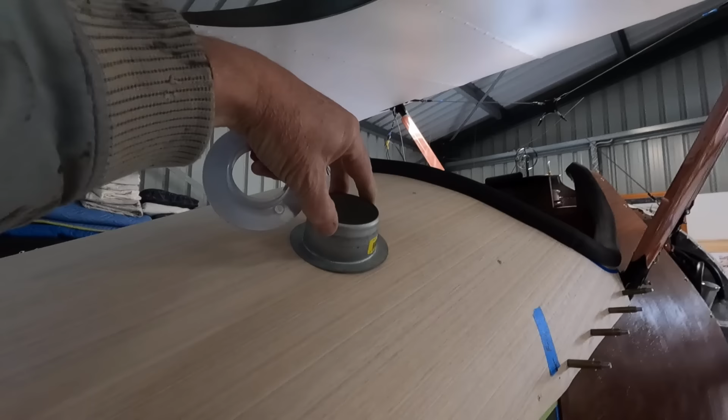Also remember last week we were talking about the handhold. Now I'm very reluctant to drill a big hole in my aeroplane, but I think I'm going to have to. Not sure if I just go with plastic. This is flat, which is telling me straight away - I guess I could hit it with the heat gun to get the flange to sit down flat, then paint that up. I've got a metal one which could do it, I could potentially tin tap that. Depends on, that's probably 3-inch I think. I got a 40mm and I got a 50mm. Screaming test piece, isn't it, guys?

As I covered off before, you don't want to go boring through the longeron, or stringers - I know someone corrected me on that, but these guys here, they are longerons. So, yeah, do I want to drill a hole in this? I think I'm going to have to, so I can get in and out. I'll practice getting in and out.

Today I'm going to reinforce the inside edge, and that'll probably be it for the day. First of all, I'll take out the bracket and fit the anchor nuts, get the bolts in. Then hopefully take it off once, stain it or sand it, stain it, a couple of coats of clear, and put it back on permanently. That is the plan. When I say permanently, this one will stay in here. These will come out, I should be able to slide this panel out. I have to be careful on the other side because I've got the foot peg there, which means the panel won't slide down.

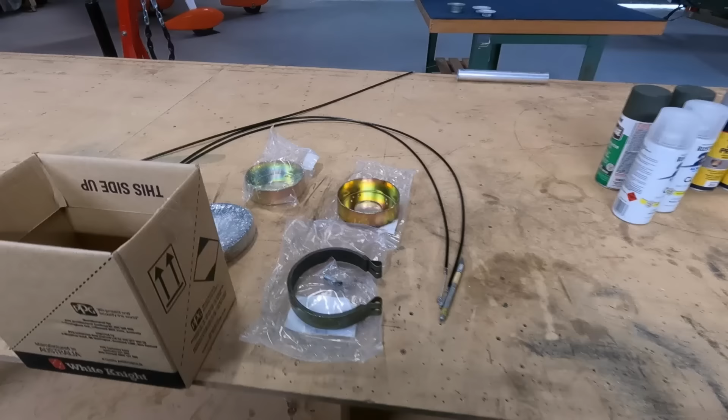And brakes. So my paint can go away for now, till the wheels come off again to do the brakes.

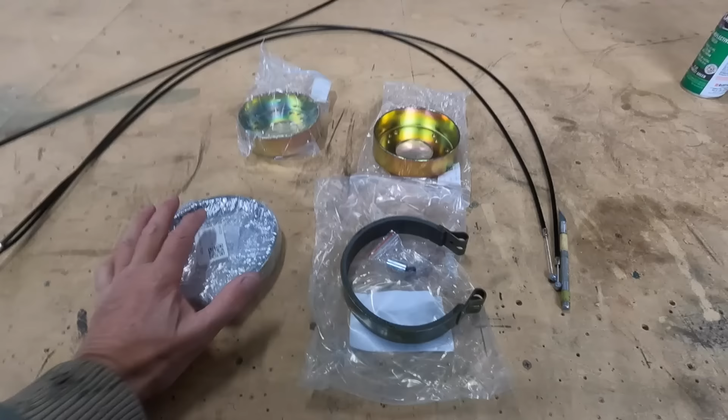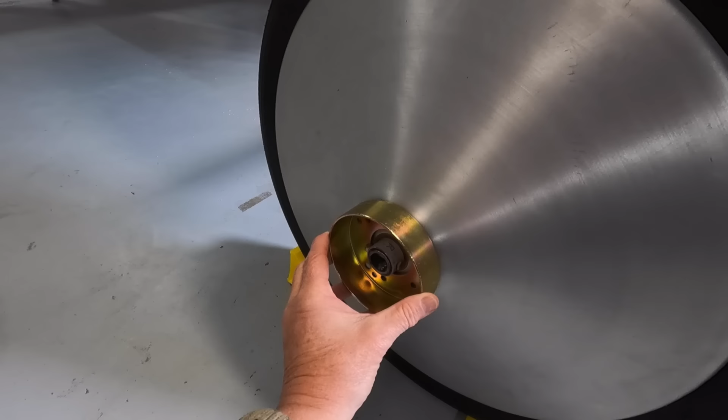So I got these off Amazon, believe it or not. I know that sounds cheap and nasty, but sometimes you got to do what you got to do - keep it simple, silly. So something like this, I can imagine, I don't need a lathe to do it, obviously on the inside guys, but for the sake of the video - to do a disc, you've got to space it out, it's got to run pretty much spot on, like true. This old guy, haven't offered this up yet, but yeah, I'm hoping - I can do a plywood disc or something to help me centre that on there, and it'll pick up similar bolts to this on the inside.

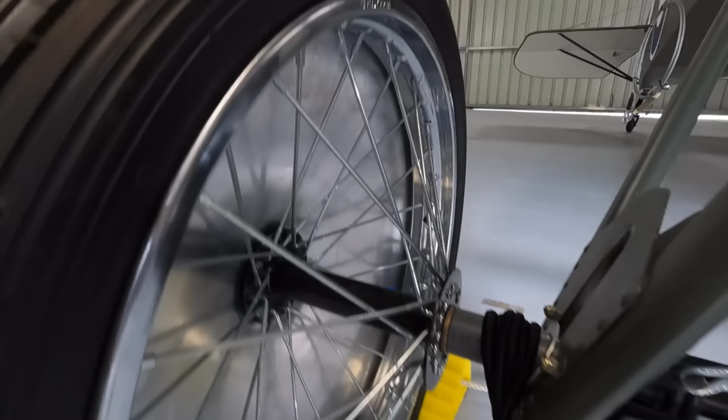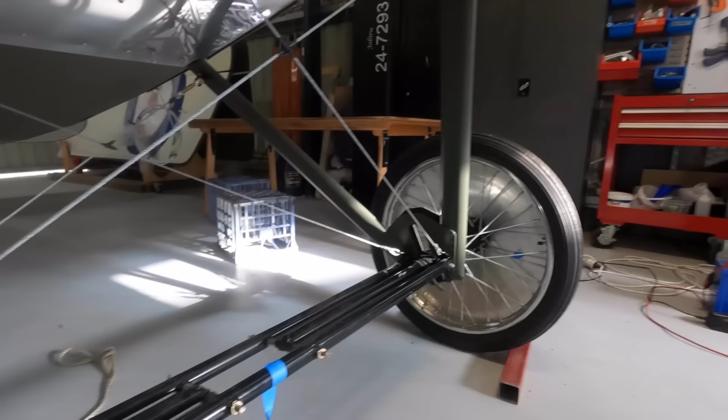Now, a few people have asked about the wheel covers on the inside. So as you can imagine, this will go in there, but I need to get into the back to do nuts and bolts up, so it's just easier at this stage. Maybe in the future that can be a retrofit to cover those up. But for now, who knows the longevity of this aeroplane, so I'll leave the inside ones off. We'll get the brakes on, so that'll fit, that'll sit on there.

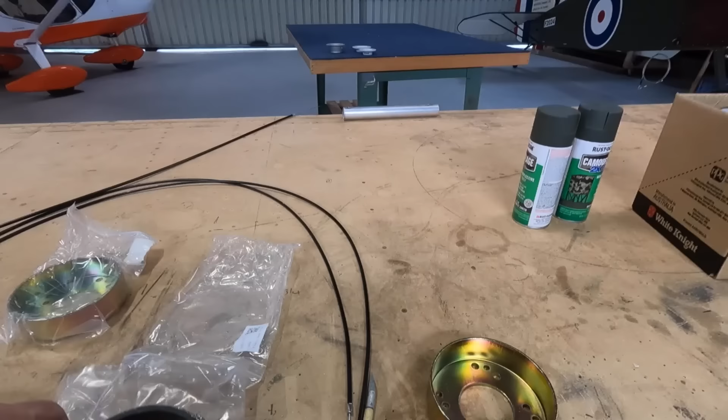And then I need somehow to hold the band on. So the band, these are go-kart brakes. They're good enough for a go-kart. However, go-karts don't have 21-inch wheels and all that leverage. And then the band simply goes around the brake, and it squeezes on. Are they going to be effective? Time will tell, I don't know.

It's basically just to pull me up at the fuel bowser and things like that. And then I ordered this - an excavator throttle, I think it is, a throttle cable. What I did find, actually, they've got some great marine cables, like Bowden cables, which is what I should have done for the throttle cable. Anyway, hindsight. Now, this is only a cheapie off eBay or Amazon, one of those.

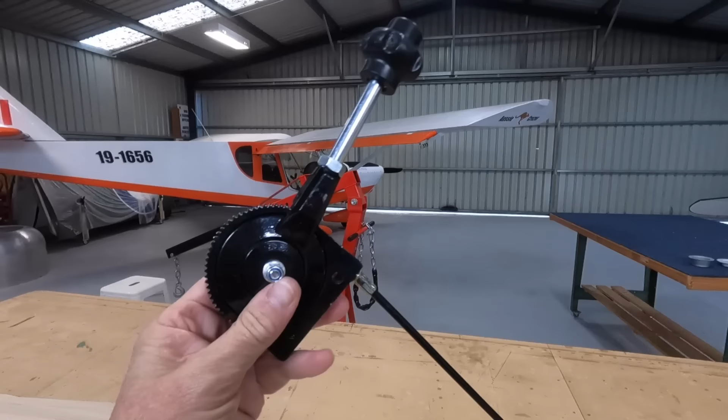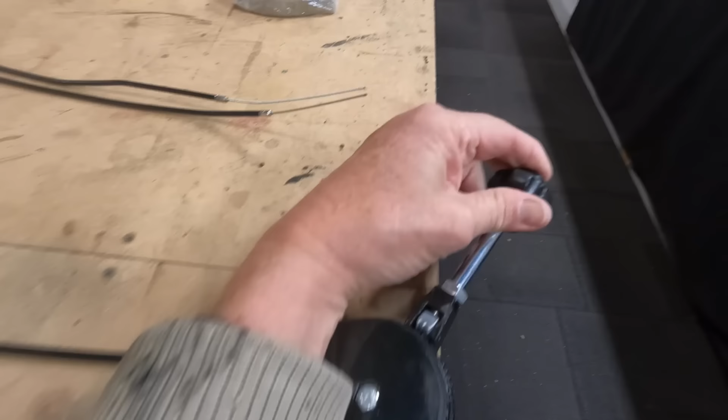Starting to think there's a few too many moving parts. The little ratchet thing there, it's working for now. That just works like that and then locks in with a pin. You'd have to stop that pin. Just a simple bit of tape, I guess, would stop that pin coming out. There may be a few too many working parts. I want these to fail off. I don't want them to fail on.

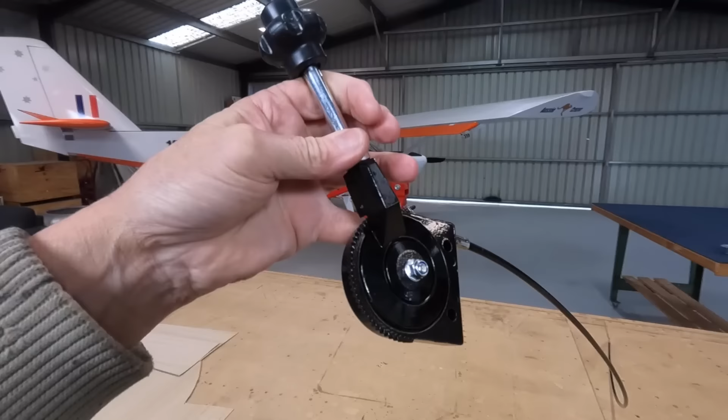And I think for that reason, I'll go with just two brakes, like dual brakes, no independent braking. Keep it simple - brakes are either on or off. Well, obviously I can pull the handle. So I may even take the locking mechanism out. So the brakes are always off, apart from when I pull the handle. And if the handle breaks, they fail off.

Just what I'm thinking on that.

Put the anchor nuts in. Needs a final trim. Both sides. All nicely done, putting a nice little orifice in there. Beautiful.

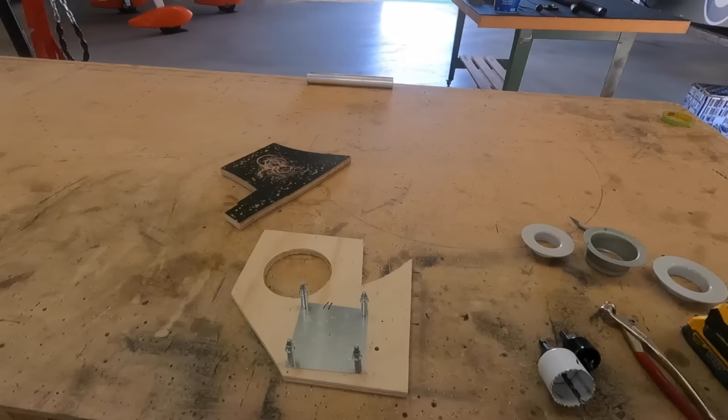So I'm just having a play to make my own flange. These are like $2 each, but we'll try and make one ourselves, just out of a bit of scrap. So I'm just sneaking up on this. I need to make a hole under here to tap down into. But while I've got centre, I'm now going to draw the outer, because then I'm going to lose centre.

I think I'll drill through with the small size, and then pull the aluminium off, or just drill through the metal, which will leave a centre hole. Find centre again with the big one, drill out the plywood, and then I should be able to tap the aluminium down into what's left. Yeah, a lot of thinking going on just for a little job, but we'll see what happens.

Okay, time to bite the bullet and drill a 2-inch hole in my perfectly good aeroplane. Just thinking, am I going to lose strength?

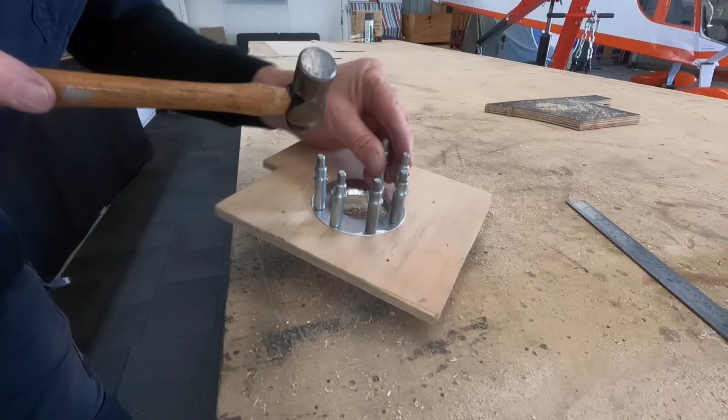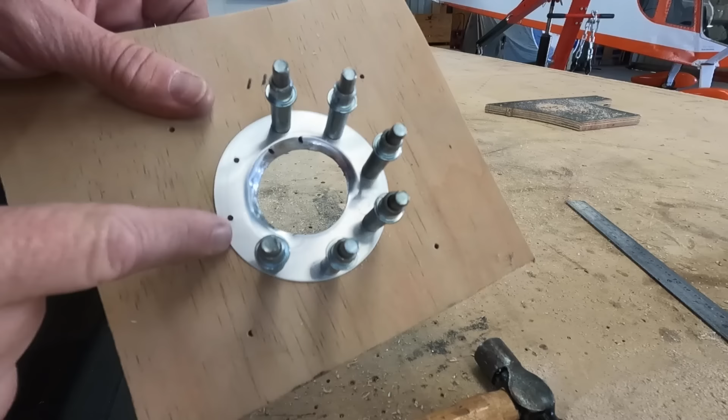Okay. Probably the most nerve-wracking thing I've done, I think. Just working that flange around. Bit of time, bit of love. This is my second go. Beautiful. All right, knocked a bit of sense into that.

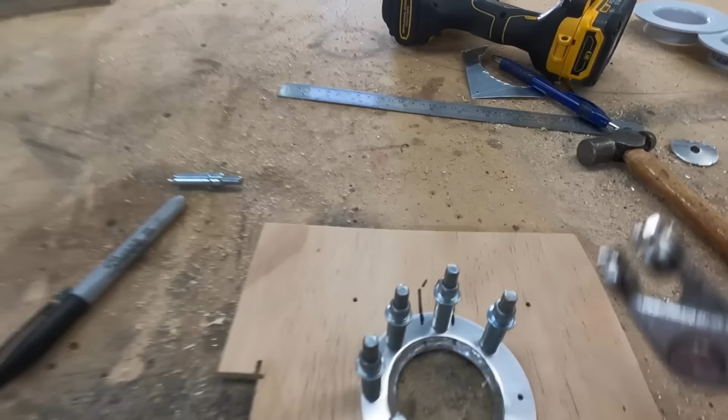I think what I'll do now is pull out the clecos, mark it. I'll leave it fat - what I mean by fat, you can see it's not tucked in. And then when the time comes, which is not now, final fit, once it's stained.

Come on, baby, you have to go in there because you're the same size drill. Once I get that feathered edge off, that'll go on there nicely. Beautiful. And then I can finish - I can sort of tap it around both surfaces if I so desire, rather than have to try and open it up a bit wider now. So that'll be something like that.

And then when I hop in the aircraft, fingers go in, foot in the camel toe, and then up we go. Have to probably try not to lift the skin up too much. Anyway.

One very time-consuming hand hold, I guess. It's also going to add to the aesthetics, one would imagine. Polish it up, look nice.

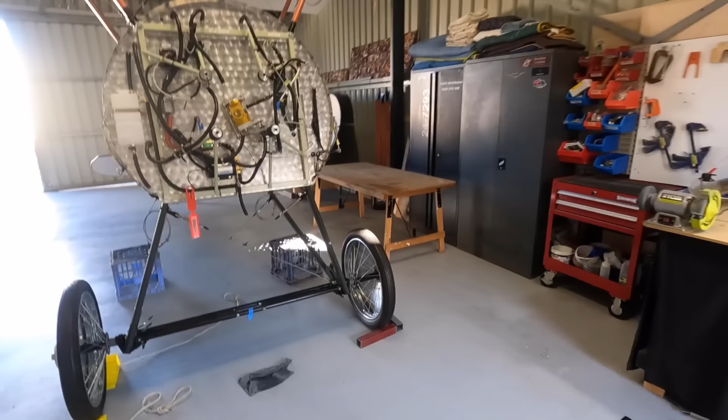Okay, it's that time of year again. I've walked in, started breathing, put the kettle on, and I'm making rain - all the water on the floor dripping on my aeroplane. I seem to remember this happening when I was painting last year. How time flies. So I've got a bit of water dripping on my bare wood. Yeah, that's alright - someone said to me once, wood's meant to be wet, it grew up in the forest.

Freezing cold, it's actually that cold. This is my water for when I grind and sand stuff, my cooling thing. It's got ice in it.

So I've had a few days off, went fishing, sailing down the mighty Murray River - not sailing, in my tinny. Had a great time, caught absolutely nothing. But anyway, so.

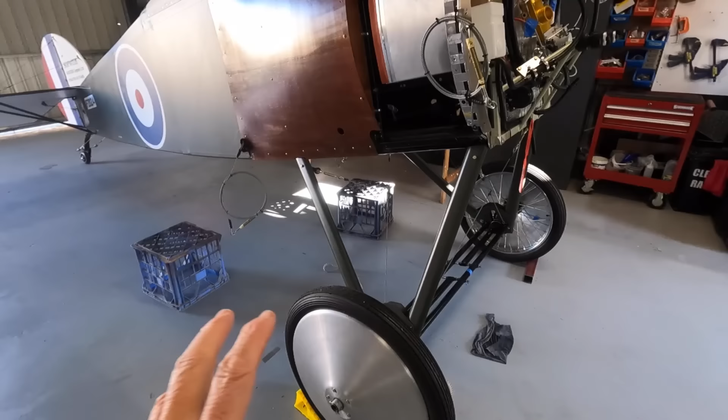I am going to now pull this off, trim it all up, sand the edges, fill the holes, and we'll get a coat of stain hopefully on that today. Get all the tape off - just doing these jobs, make it look pretty. Then I'll go back, run into that situation again when it's going to be too cold to paint.

These things will be freezing at the moment, but the sun's going to come out. It'll be about 15 degrees later. I'll get them ready.

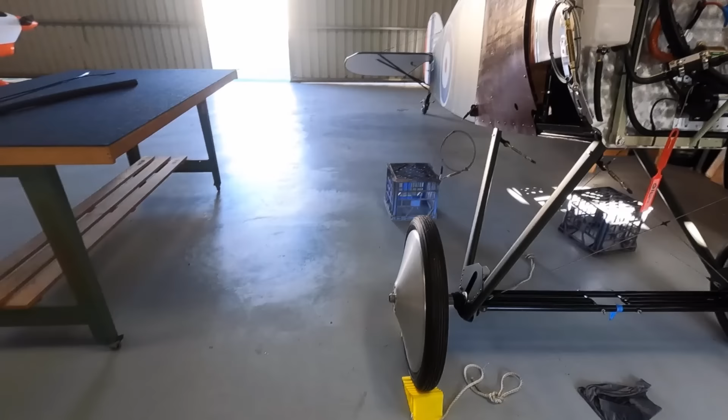How am I going to do that? I need to, just thinking out loud, I need a jack to take the wheel off, get the hubcap just off there. I don't want to pull the bolt out. Maybe I could - no, it's not worth the trouble, because if the collar comes off and the wheel slips, the aeroplane's going to drop. So I'll do it properly. Get the hubcaps, I'll get the spun aluminium wheel covers maybe primed.

Okay, I got the turtle deck off. This thing is super fragile at the moment. I could put another stiffener, but I don't want to change the shape. I will put another stiffener when it's fitted again. So this edge is rough cut, and I've just sanded it because it's too flimsy to try and do now and risk cracking this.

So I've just trimmed the edges, both edges. Got to just round the edge nicely, and then put it back in the panel stand, I'll give it a stain, then a couple of clear coats. Just can't wait to get it back on, actually, then it can't break. It's strong when it's on, when it's off it's like an eggshell, and you have to be very careful. I've caught a couple of dags already, and you can rip a bit of timber out.

The weak spots are where these joins are, because I got a bit lazy trying to do that in situ. But what I'll do is a nice piece, I guess, all the way around once it's fitted. Got the Cedar stain on. As I said before, very fragile, this piece at the moment. Yeah, I could fiberglass the inside or something, but it's not meant to be handled, I guess, once it's on. I'll let that dry for an hour or so, and we'll get a clear coat on before I go home.

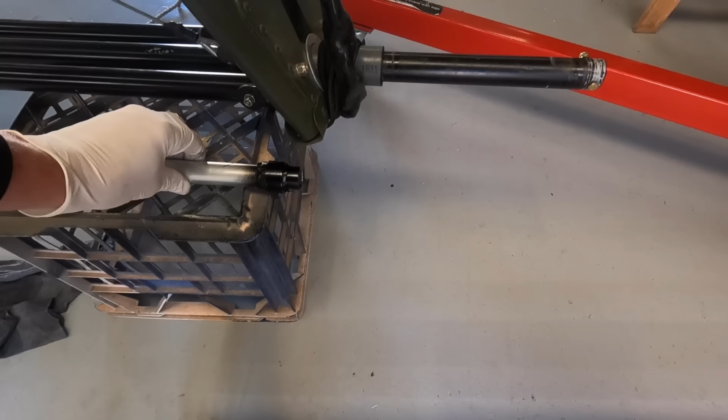So wheel off. I just painted my wheel retainer - that can stay there. The good thing with rattle cans, I'm just going to do one wheel at a time so that I can share the jack, if you know what I mean. I don't want to take both wheels off, for obvious reasons.

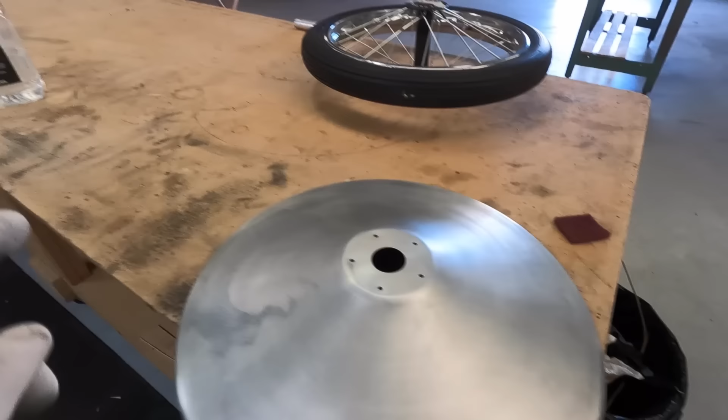And the cleaning process begins. Scotch-Brite, give it a good scuff. Now I'm just going through with the good old wax and grease remover, and I clean it until no grey comes onto the towel. That's what I found best.

Then we'll hit it with an etch primer. So I've got my etch primer and my paint in some boiling water, well half and half, so warm water, just to get it happening. We'll get one wheel probably just primed today, a couple of coats of primer, see how it turns out. Probably like to give it a 400 in between, and we'll get this painted.

While I'm painting that, I'm going to work on the brakes, just on this side.

We got some primer on the spun aluminium wheel cover, that's outside. Put a coat of the good old Cabot's, what do we call it, polyurethane, Cabot's exterior clear, yeah, polyurethane. That was called cabothane.

Now I just make sure I haven't got any goobers running out the holes. I've got some fur on there, I'm not worried. Once this sets up, it's a lot easier to sand. So any goobers and things off the rag will dry hard, and then I'll get them off later.

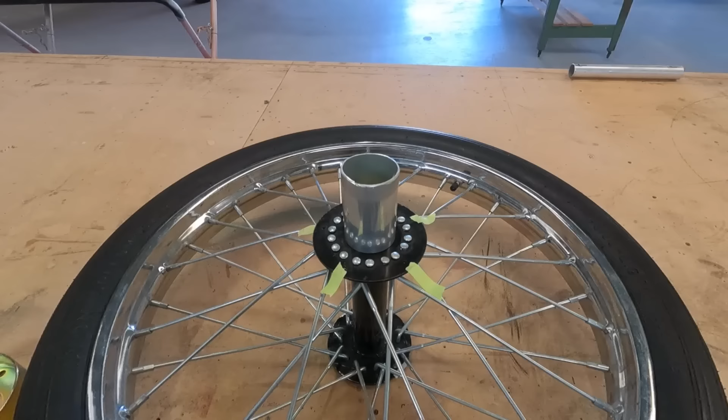So in between jobs, I've just marked the holes, the pre-existing ones on the hub. Now I haven't got a lathe, but I've got tape, so wrap that in tape, had a bit of wing spar, so that is centered, if you like. Now what I'm going to do is wrap the outside of this piece in probably electrical tape, and that'll center my drum on the disc, on the hub, or the wheel.

And this has got holes in it, so I either use the holes or try and completely miss. And that's what I'm working on at the moment.

Okay, a bit annoying, the holes don't line up, which is fine, but they're too close for comfort. So we'll go with a 3-bolt pattern. I've made sure I can get the nuts on in the locations I've decided to use. I'll drill 2 more holes, square this up, bolt it on.

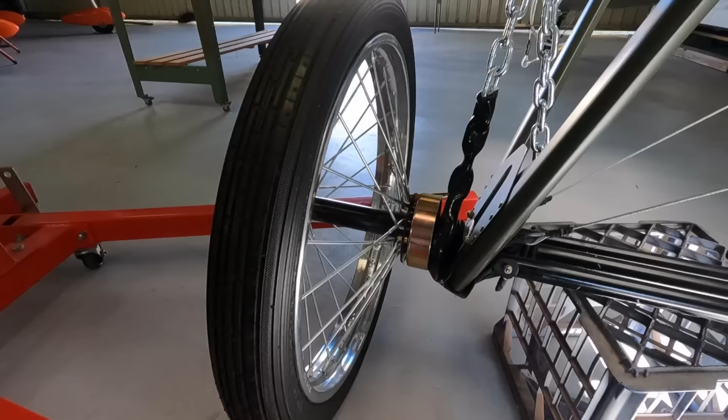Okay, kicking goals. In my very basic hand tool workshop here, I've managed to get that brake drum on there, and for me, yeah, it's got a, you know, if we're talking in millimetres and not thou, we're pretty good there. It's got a little bit of rise and fall. I could undo the bolts and muck around and tap it around, but for the type of brake that it is, I reckon that is fantastic.

Right, good job. So while I'm waiting for the weather to warm up, I'll place these under my very expensive roof here. First wheel cover, it looks a bit dull, but it's going to get a satin gloss, 3 coats of satin gloss, because that's not fuel proof at the moment.

The inside cabothane clear has dried, we'll flip that over. Probably maybe 1 coat today because of the weather. Be great to get that sanded. I might even paint that now. Got to be careful, you don't want it to blush or whatever in this cold weather.

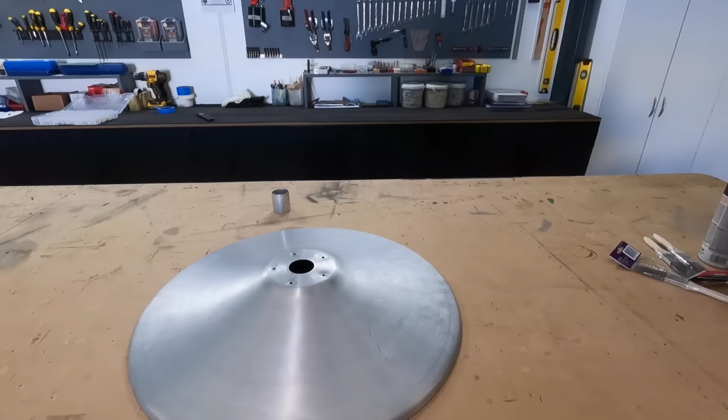I'll prep the other wheel cover, get that painted up, make sure I label left and rights. What else? Spray the little collar black, and then I might work on the crosshairs at the top.

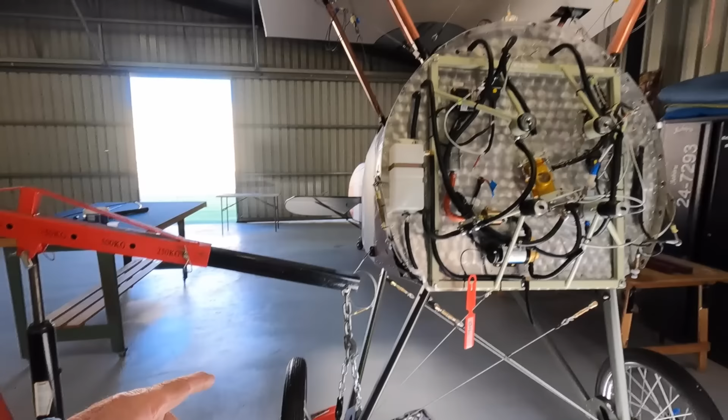Okay, well, I've got my painting going on outside. I'll warm the paint up, just put the rattle cans in warm water.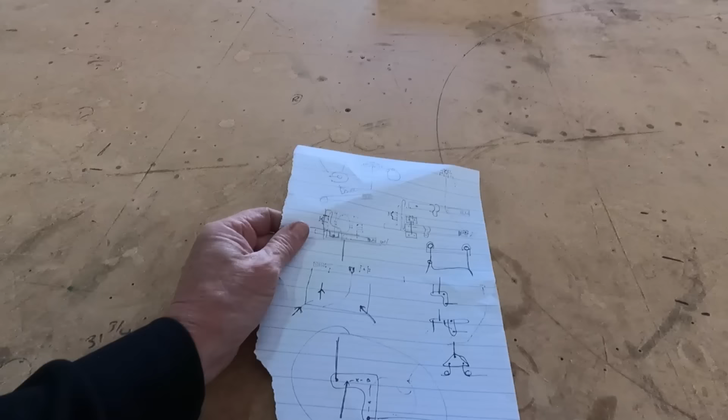I've had a quick scribble with some brackets. This will mean nothing to you, as we're trying to work out the bell cranks and whatever on the bottom.

One lever, and then I thought, let's keep it simple, stupid. We'll do a lever on each side of the seat, so then I've got independent braking. I can pull on both if I need to - yeah, it'll take two hands.

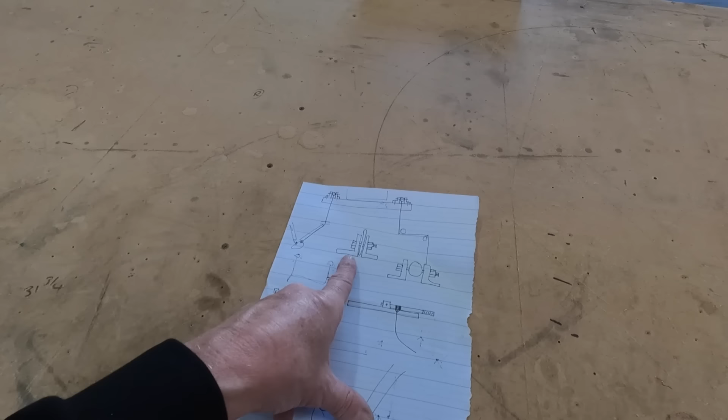And we'll go with that. So I rummaged through the scrap box, found these tubes - it was 22 inches. I cut it in half, 11 inches, which is also the gape or the bite on my bandsaw.

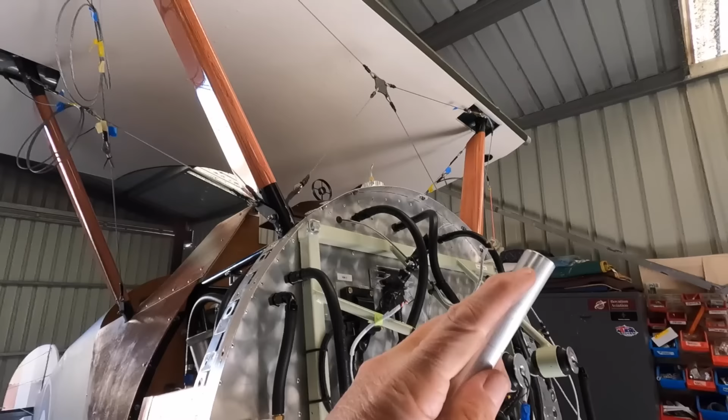What I'm going to do is just make some brackets each side with a bolt, and for now that'll just be a handle. Then I thought, oh, a bit of fun - this will get wrapped in wood wrap, and I'll put black rubber for a little handle.

I won't know that until I work out how much leverage I actually need. So because I need a pull, this will be fastened at the back, like what I've sort of come up with here.

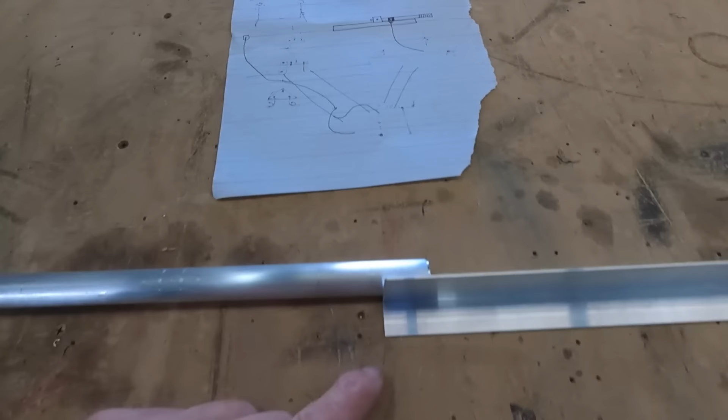Fastened at the back, I'll put an Adel clamp on here to grab the cable somehow. That way I can just slide the Adel clamp along to give me more or less leverage. So we'll knock these up, get the handles made, just a little fun job, and then we'll worry about connecting them later.

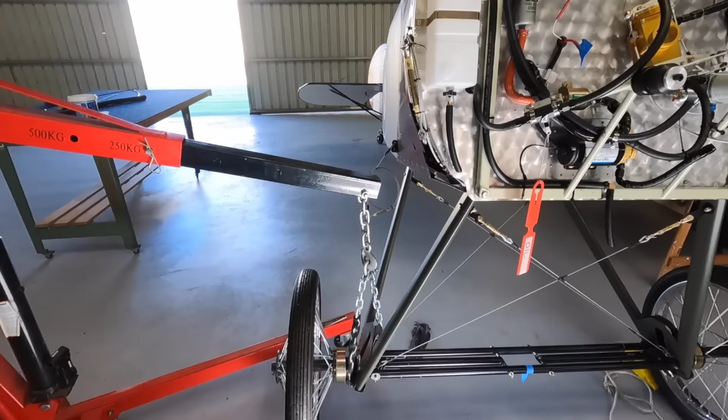I'm going to have to run the cable up through the leg there somehow. I'm sort of nervous about drilling holes in the undercarriage leg, but I've got five holes down there, like here, with the rivets. But also the cable needs to go up and down.

I could do some of these one-eighth cables with these sort of fittings, but if it hasn't got a housing and the suspension was to go up, then the brakes would come off, wouldn't they? I think they would.

Or the bungee - if the bungee was to break, then I'd have no brakes. Well, I'd have brakes on one side, I guess. I have to think about that, because this looks fairly substantial - these cables, as opposed to the cheap little bicycle cable, these guys.

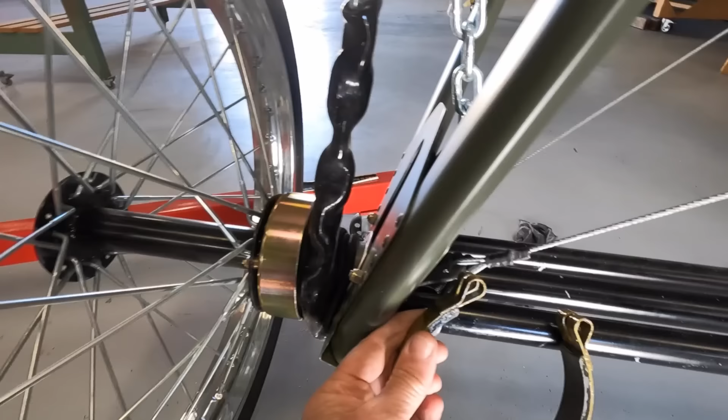If I ran - so here's the brake pad, if you like, which will go around there. I've had a decent cable on it. Work on that.

So I'm not sure where I'm going with this, but I've just made up a - I drilled through my finger. I just made up a handle.

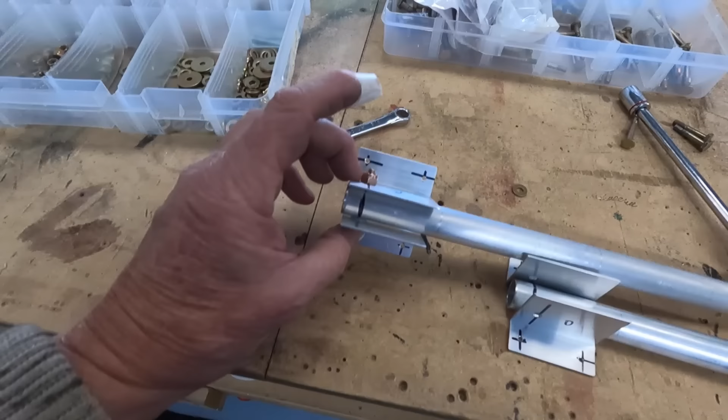I know it could be castellated nuts, but for now it's just that. Put some Teflon washers in there, so that will be a brake handle - brakes on, brakes off, one each side, and we'll run the cables down.

Probably have to take the side panels back off again. That's how we roll. Alright guys, so a quick wrap up.

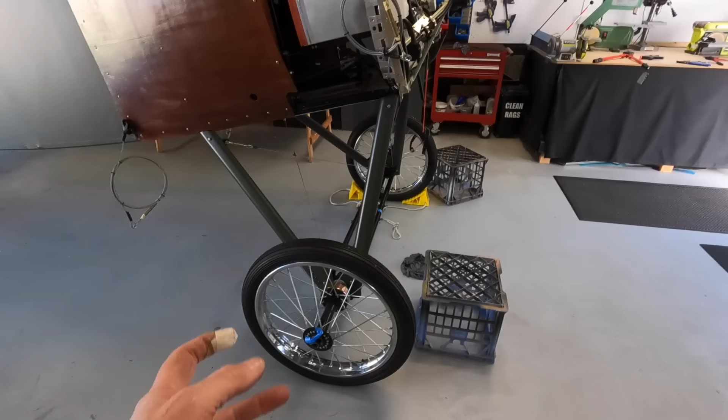Three coats of primer, three coats of colour, three coats of clear coat. Let that dry thoroughly, then they can go back on. To get them on, I need to take the wheels off. Brakes are looking good.

All the blue tape, guys, just reminds me that things are undone or need to be done, like up here. Now I've just been working on - I've fitted a turnbuckle here.

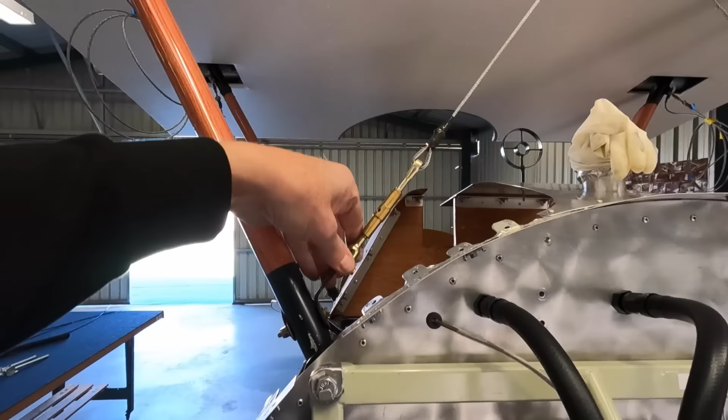About to do the other side. Sort of did it in situ, if you like, because I wanted to keep it relatively in rig, but I've got an open fuel tank, so I don't want to use the grinder.

So I've just done my knuckles, to be honest, trying to cut the wire by hand. I undid one side and dropped it down to do the crimps, put it back up. I'll do the same on this side, and we'll be pretty close to done on this.

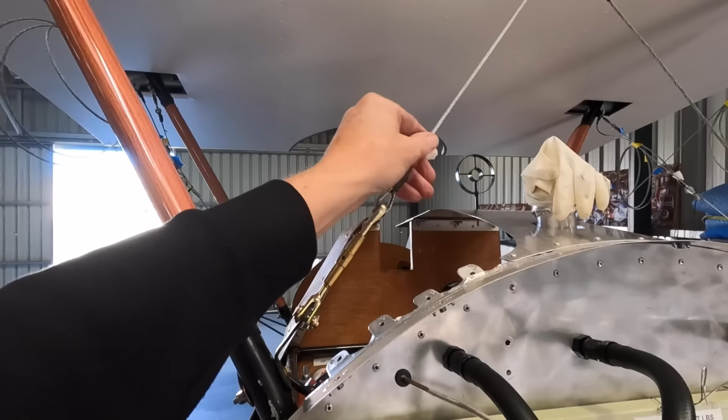That'll allow me just to take the slack out of these ones. Hopefully that works well. What I did there, I've got what I call a bullet, but for YouTube it's only a bolt.

When I knock a bolt out, I knock this in to retain the hole, then knock it out when I put the bolt back in. Makes it nice and simple. I'll probably make up a few of these, not with bolts, but out of wire or something. When I put the wings on, just slide all these in the wrong way, and once all my helpers go, I'll tighten them up and put everything in safety.

I was hoping, after I cut the wire, that with a 4 or 5 inch turnbuckle you'd have enough left just to loop it around and do this end, but you need a good tail to pull it through. So it's a whole new piece of wire.

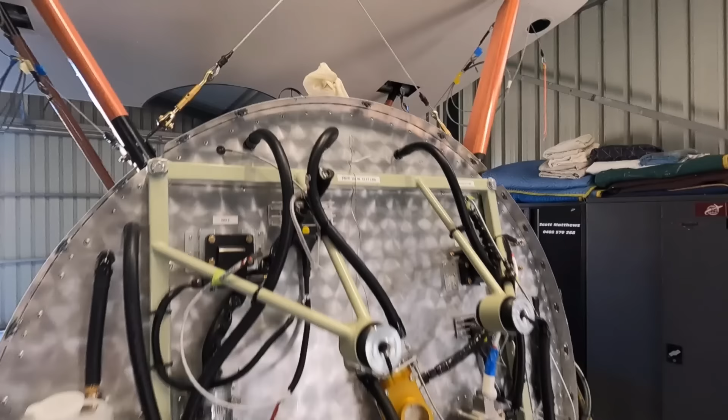Nothing's in rig yet, but we'll get this side done now. I've been wanting to do this for a while. That can come off. I've got my 2 turnbuckles in. Now these wires, it's not in rig yet, but I can tension them so it's nice. They're a lot better. If you remember before, I'd pull this one and that one would go slack, and vice versa. Now it's all nice and everything's centered. So that was worth the effort.

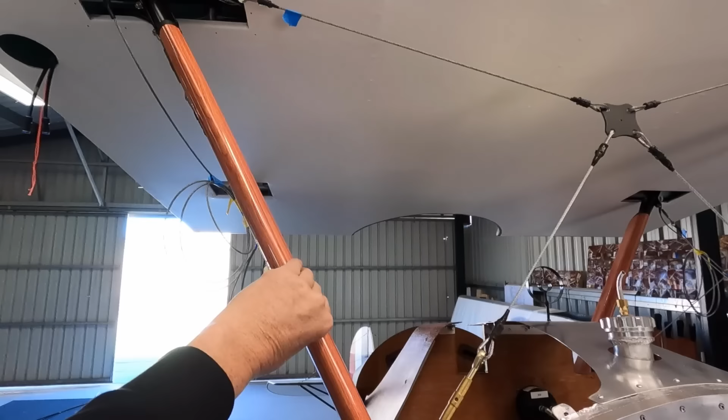So I replaced both these lower cables, added the turnbuckles, and did all the rigging. What I'll do is back all these off 2 turns to allow myself some wiggle room, then we'll plumb bob the aircraft and use the incidence meter that no one seems to use, and get it all in rig.

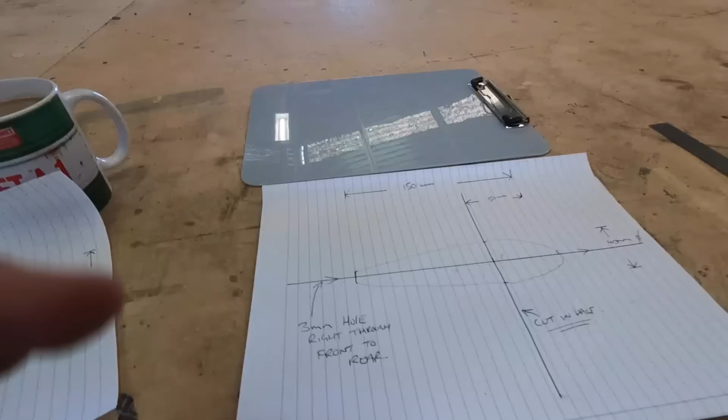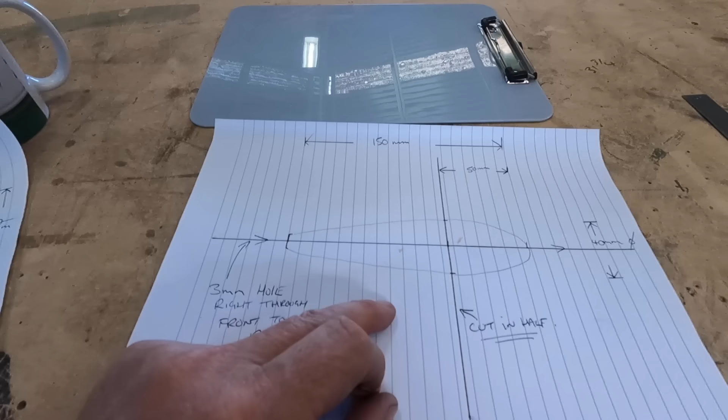A bit of R&D going on with a cup of coffee before knockoff. I'm just going to make a little torpedo piece to go on my bracing wires. I've just drawn it up. I'm going to hit up the men's shed - I've got a friend there who's got a lathe, so this will be a lathe job. It could even be out of balsa wood, to be honest, but just a little torpedo shape, cut in half, with a 3mm hole up the middle so I can screw it together. I'll stain it up, probably a silver nose.

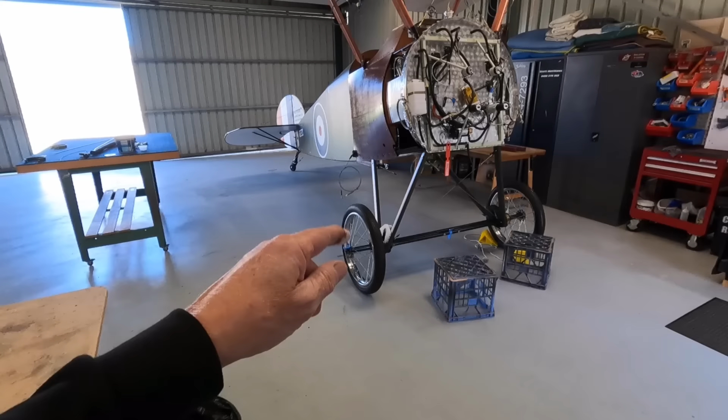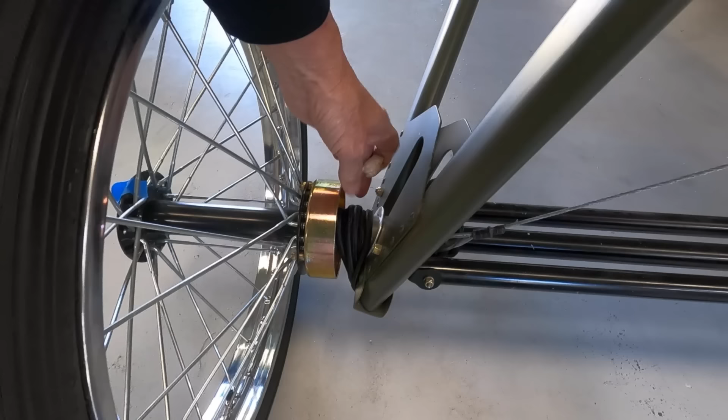So we know we're getting serious when we're into pieces like this. My next little thing to design, I need a band to go around the axle with an arm off it to connect the brake. Then I'll put a bolt straight through, probably on the inside there, and we'll work out how we're going to mount the brakes. I'm really happy with the drums so far, now I just need to get them working.

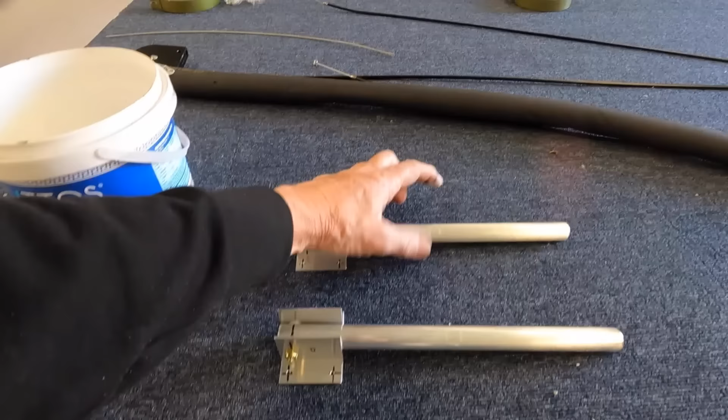Did I show you the handles? I made the handles up. I'm just going to have one on each side, so independent braking is hands off - grab both handles and go for it.

Alright guys, from the R&D factory here at Latrobe Valley in Australia, it's starting to look good. Doing some pretty jobs now. Temperature's starting to play a part, so I can't get a lot of painting done, but that's alright, I'm not in a rush. Tomorrow the spun aluminium wheel covers can probably go on. I'll get a second coat - I'm looking over there because that's where they are. Second coat on the turtle deck after a nice sand, it'll come up really nice. The best spot for that turtle deck is back on the aircraft so it doesn't break.

We may look at some brakes. It's a bit counterintuitive to put the turtle deck on and then probably have to pull these panels off to get some brakes mounted. I need to get a little bracket made for the brakes before I can go full bore with that. I think I'm going to get to a point where I need the big expensive part at the front.